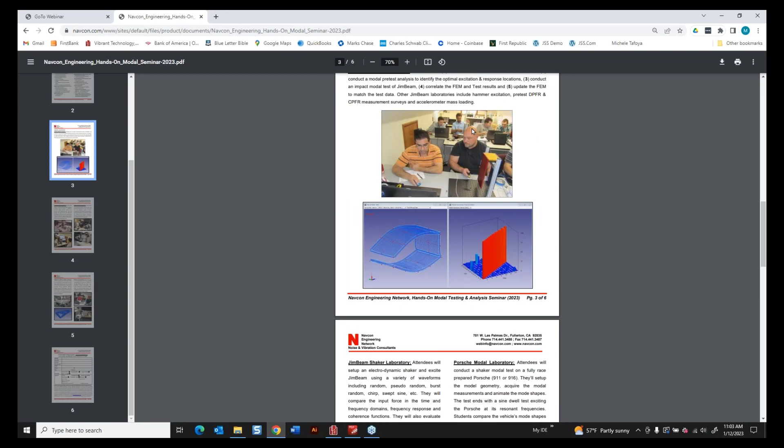This webinar is following App Note 54, which is called Simulating a Rapid Impact Test. On our website, vibetech.com, you can click on the resources tab, and if you have a current MEscope license, you can download App Note 54 and follow along.

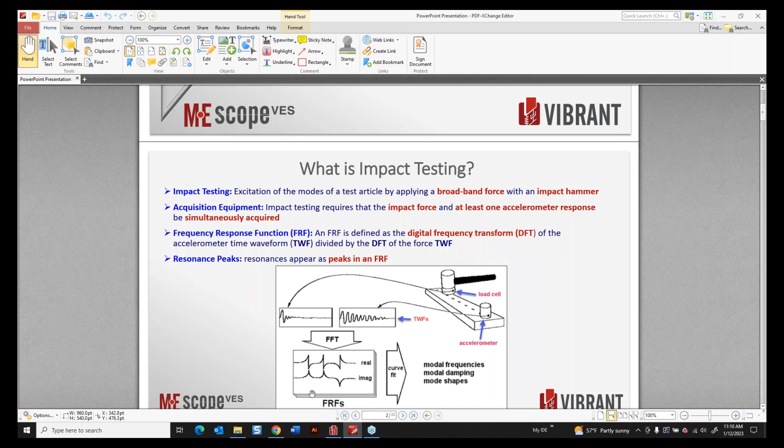Here's a definition of an FRF. It's the digital frequency transform, the DFT. Again, these are commonly used terms, but we use them a lot at Vibrant, just so that we're all on the same page. There's a lot of terminology. Some people would just say, well, that's the FFT. The FFT is an algorithm that takes the digitized time waveforms, which we call TWFs, does a Fourier transform on them, and creates digital versions of the spectrum of the signals. So here we call that a digital frequency transform, or spectrum. You can interchange those words also.

So we get both a DFT of the accelerometer response and a DFT of the force. Both of those are simultaneously measured. And so we need 2 channels that simultaneously sample and filter and condition the signals, amplify them, whatever goes on in the acquisition equipment to provide two TWFs, which then are converted into FRFs. Then we go through a process of curve fitting, and we'll do some of that later in the webinar.

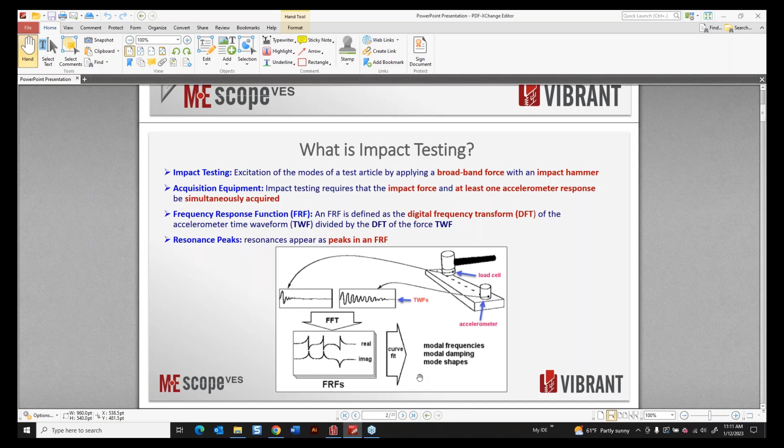And we extract 3 fundamental properties of every structure that vibrates, which is virtually everything. If there's mass and elasticity in the structure, it will vibrate if you apply a force to it. Even the earth, I've experienced it out here in California. Earthquakes cause the surface of the earth to resonate, only for a short period of time, but I've actually witnessed it during earthquakes. Okay, so let's move on.

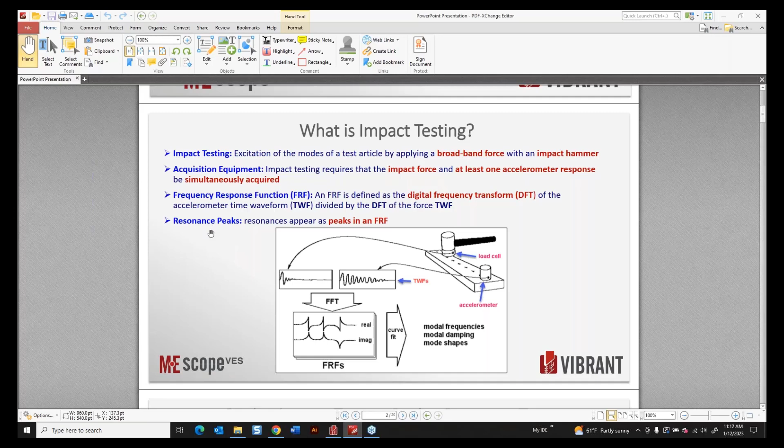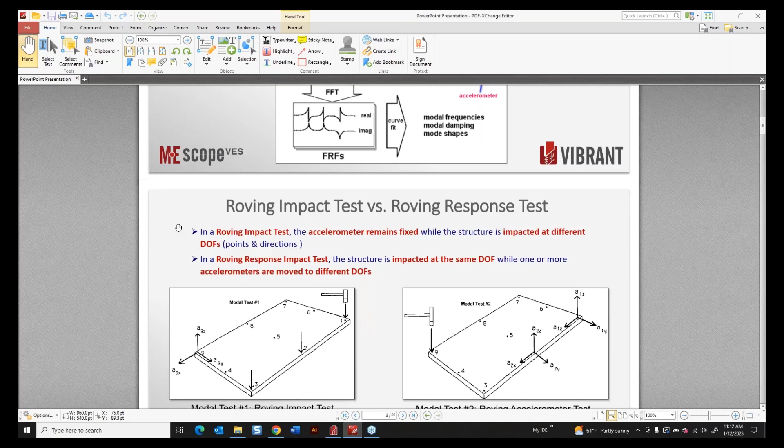Now, here's a key issue. Resonance peaks occur in an FRF. So that's why we make that type of a measurement. Now, a couple of weeks ago, we had a webinar, some of you might have been in attendance, where we asked the question, do these 2 types of impact tests yield the same information? And this was part of another app note, and we have over 50 of them on our website. So if you have a license to MEscope, you can use these app notes for self-training, or even use them among yourselves as engineers to get familiar with this type of testing.

Anyway, a roving impact test is the one on the left. That's where the accelerometer that's measuring the response remains fixed to the structure, and the impact hammer roves from one point to the next, and it can even be in a different direction, and that would be a unique measurement also. And then the test on the right is a roving response test, where the impactor is applied at the same point, same direction throughout the test, and the accelerometer, in this case a triaxial accelerometer, is moved from one point to the next.

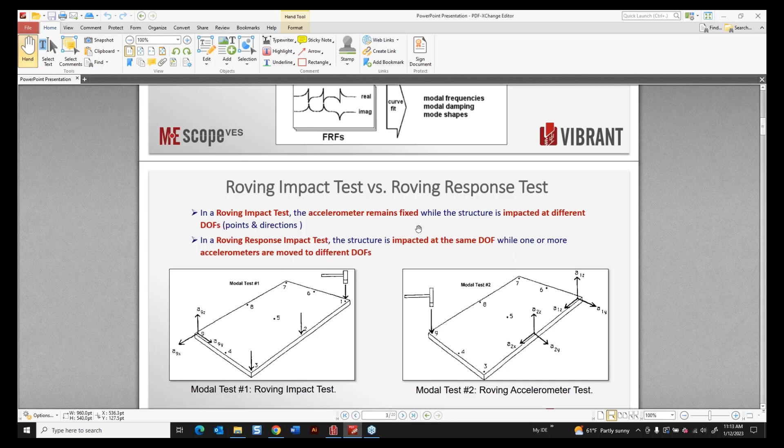So these are the 2 simplest ways of doing an impact test. And of course the question was, do they give the same modal information? Now, up here in this previous slide, the modal information that the question was asking about are the frequencies of the resonances, the damping of each resonance, and the mode shape, which is the spatial deformation of the structure at the resonant frequency. So those are the fundamental properties of resonant vibration.

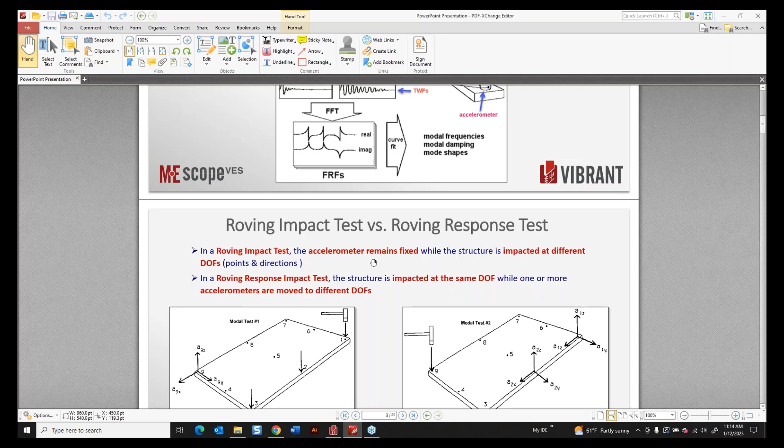And as I said, most structures that we experience here on Earth especially have all 3 properties. A resonance has frequency, it has damping associated with it, and it has a characteristic spatial deformation over the span of the structure, which we call the mode shape. So let's move on.

Okay, we're gonna simulate a roving impact test, or in this case, we're going to do a rapid impact test, and we'll see the difference. But here's a traditional roving impact test, a picture of how you would do it. The accelerometer remains fixed, and the structure is impacted at different DOFs. A DOF is a point and a direction. So at any single point on a structure, I can have 3 DOFs.

And again, we're talking about translation, just motion in a direction. Actually, I can have an infinite number of DOFs because I can just keep changing the direction of motion. So on any real structure, there's an infinite number of DOFs at each point. But typically, we break things down to X, Y, and Z, or horizontal, vertical, and transverse horizontal. You can see the little XYZ axis down here. That will capture the 3D motion of any point if we have a sensor that can sense that.

But in an impact test here, the roving impact, the DOF of that reference sensor is not part of the test, really. It can be anywhere. Well, it is a part of the test. We want to pick what we call a sensitive point where the structure is vibrating. If we put it on what we call a node point of a mode shape, that's where the structure is not moving at all at that frequency. So we want to pick active points or sensitive points for a fixed reference in a roving impact test.

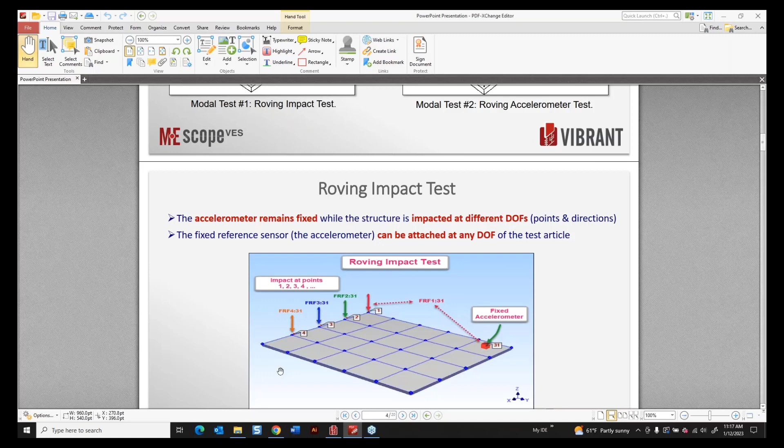And then here it's depicting 4 impacts at points 1 through 4. The other thing to notice here is that the FRFs are labeled with a particular type of label where the roving point number is followed by a colon, and then the reference DOF, in this case just a point because everything's just in the vertical, is part of the definition of that FRF. So what it's saying is that every FRF is the dynamics between an input point and a response point, or an input DOF and a response DOF.

Okay, so here's another key issue. I've already addressed this, and that is that each FRF is identified by the hammer DOF and the accelerometer DOF. In this case, the DOF is just a point number and no direction associated because everything's in the vertical. Only the roving impact DOFs define the ODS or mode shape DOFs.

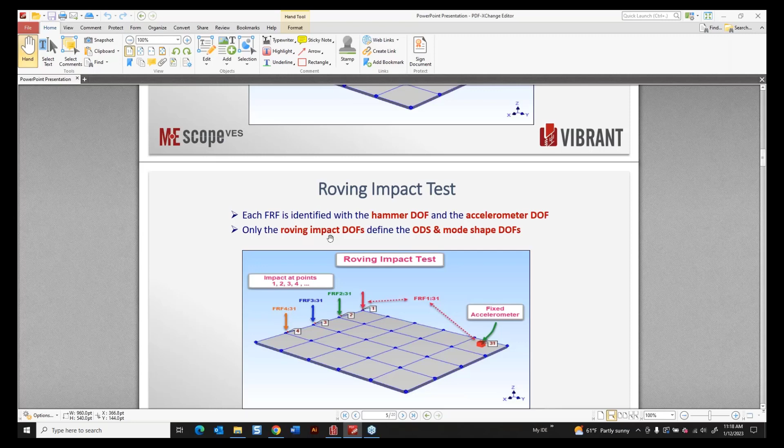So again, if we're going to define the spatial deformation of the structure, an ODS and a mode shape, we won't get into the difference between those two. Let me just suffice it to say that all ODS data is what we acquire experimentally, and every ODS is a summation of contributions due to mode shapes. That's all I want to say about that. We can come back to that if you have any questions, but let's move on and look at some live data off of this aluminum plate, this flat plate.

So this is some real data that was taken off of a plate where we impacted it with a roving impact test. And so in MEscope, the properties of each FRF are listed in what we call the M#s or measurement numbers spreadsheet on the right side. So when you open up a window in MEscope with some data in it, either time and or frequency, in this case, they're FRFs, which are functions of frequency.

So you can see the frequency axis down here on the bottom. And then this is just log magnitude. So the log magnitudes and the units are G's per pound. So what is that? Well, the units are the units of the accelerometer response divided by the units of the force input.

So if I want to get scaled data, and I'm going to go on and use it for other reasons, and we'll get into that in a minute also, then I want to scale my sensors when I'm acquiring the data so that the digital data that I end up with from the acquisition front end are in engineering units, pounds of force, G's of accelerometer response.

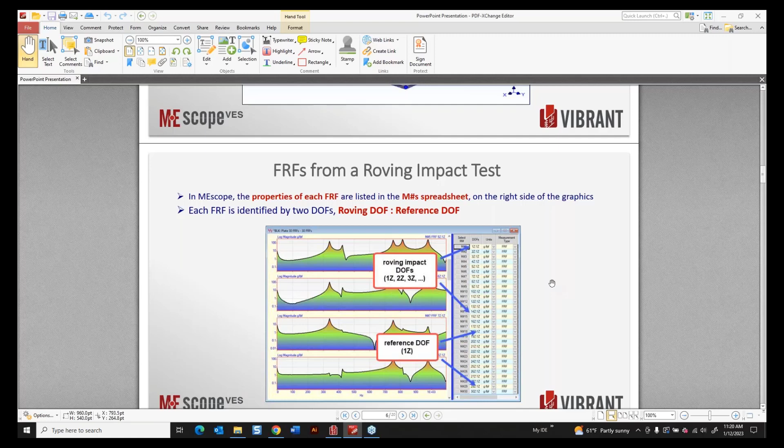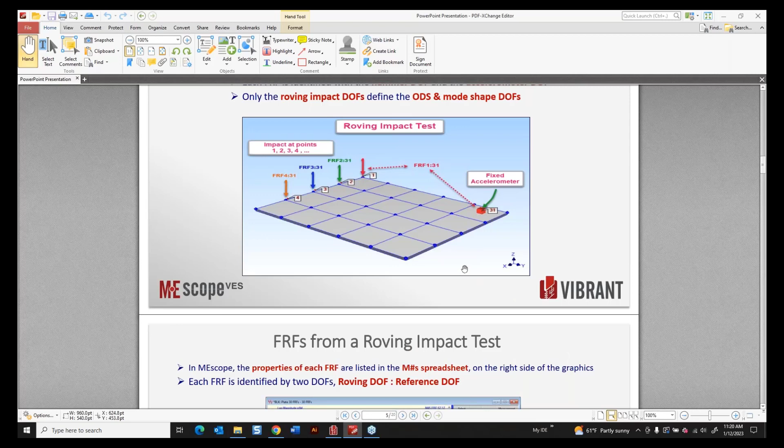Okay, the other thing in this spreadsheet are the DOFs of the FRFs. So you can see that in a roving impact test, the DOF in front of the colon changes between measurement 1, 2, 3, 4, and the DOF behind the colon is the reference. In this case, it was 1Z. So 1Z could be anything. It could be like it shows up here. It could be 31Z. Doesn't matter, because the mode shapes that we get from the data are going to be defined by the roving DOF.

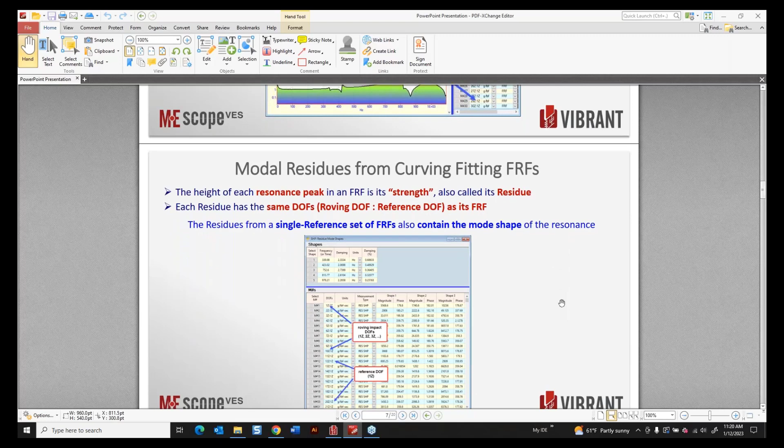Okay, so let's get into curve fitting now. This is where things become a little mysterious for those who haven't had experience using a software package like MEscope. The key step in doing broadband testing, either with a shaker or an impact hammer like we're talking about here today, is that we excite many resonances simultaneously with the force. And then we have to go into these FRFs that have peaks in them and do what we call curve fitting.

Now, curve fitting is a process of matching an analytical or a mathematical model to the FRF data. And in the process, we identify the unknown modal properties: frequency, damping, mode shape. So what do we get out of it? Well, for each peak we get frequency, which is the location of the peak along the frequency axis, and damping, which is the width of the peak. We won't go into that in detail today, but the higher the damping of a mode, the wider its resonance peak in an FRF.

And then what we call the strength of the peak is also called a residue. And that's a mathematical term that comes from calculus. Some of you mathematicians may be familiar with it. It comes from integrating around a resonance, which is also a singularity. And the remainder, what's left over after we do that contour integration, is called the residue. So just like the common use of the term, something I throw away in a trash can or something that goes down the sewer pipe is residue. However, the higher the peak, the greater the strength, and the magnitude of the residue is greater.

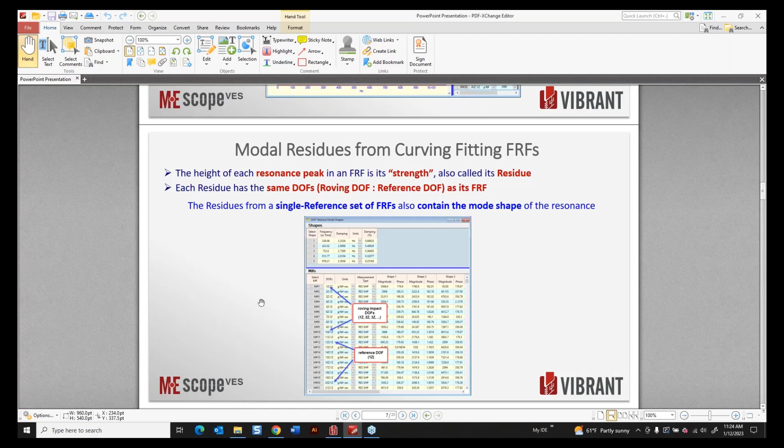So the residues from a single reference set of FRFs, which would result from a single reference modal test, contain the mode shape of the resonance. And the DOFs here, you can see the measurement type. This is called a residue mode shape. So RES SHP, residue mode shape, because we got them from curve fitting. You can see the units, they're a little different than the units of the FRF. They've got seconds in the denominator along with the pounds of force. But the DOFs are the same as the DOFs of the FRFs.

So now we're going to get into the whole issue of testing and the practical problem of testing a large structure. So here we have kind of a small structure. It looks like a little beam, but just imagine that to be a bridge or a large space structure, launch vehicle, whatever. I've had experience over the years of testing bridges and space shuttle launch vehicles, very large. The impactor, of course, is larger, and the accelerometer can be larger, but typically there you use an accelerometer that will sense lower frequencies. So as you go up in size of any mechanical system, structure, machine, you want to make sure you capture the lower frequencies.

Okay, so here's a picture that shows an impact hammer with a load cell that's going to measure the force. The accelerometer is going to measure response. And this is a roving impact test where I can locate the analyzer close to the accelerometer with a short wire. So we're assuming that this is a more traditional way to do it. Now we're getting into the use of wireless sensors and video to do this type of testing also.

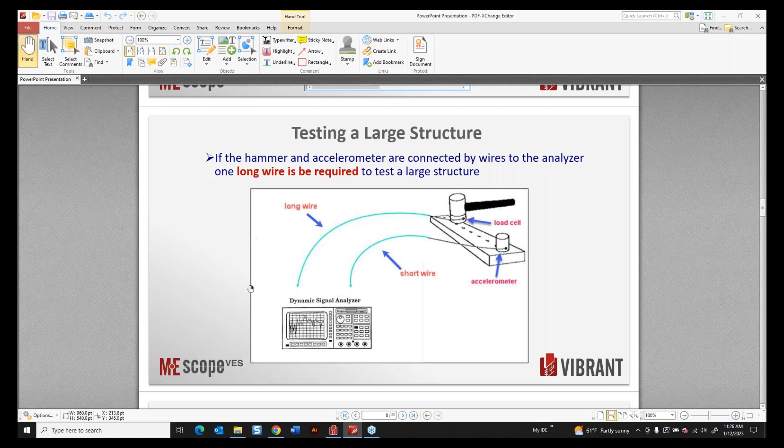But more traditionally, if you're going to go out and test a structure, a car body or a frame, and you want to do a roving impact test, you're going to need a long wire to go from the load cell to the analyzer. So here is the difference.

If the analyzer can be moved between acquisitions, and we have lots of portable analyzers now, battery powered, small analyzers. In fact, I'll mention right here that with our rapid impact testing software and a 2-channel analyzer, Modal Shop, which is one of the vendors in our business, offers a 2-channel analyzer for about $1,000.

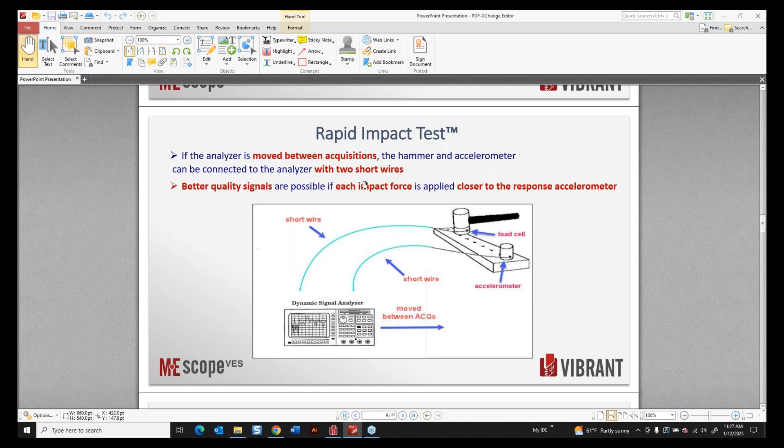Okay, so if the analyzer moves between acquisitions, I can do it now with 2 short wires. However, I need processing, and MEscope has it. We'll look at that here as we go along for processing this data. So here's some more comments. Rapid DOF: both the impact DOF and accelerometer DOF can be changed between acquisitions. However, we need to form a chain of acquisitions, and we'll see that in a minute.

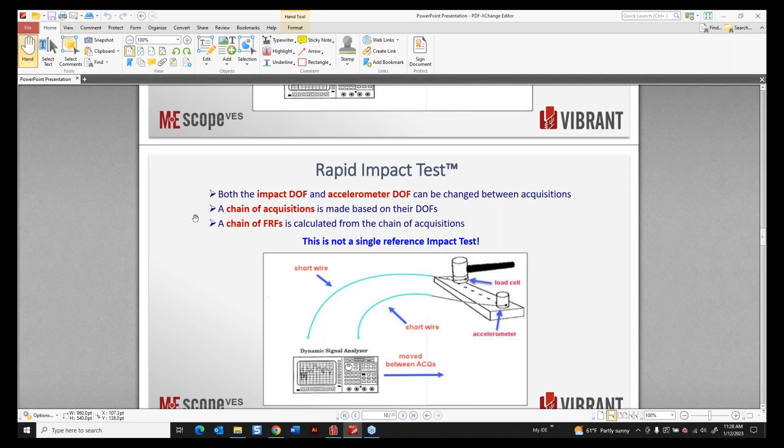The chain of FRFs is calculated from the chain of time waveforms. So everything starts off by capturing the dynamics with time waveforms and then using FFT processing and other signal processing. But this is not a single reference impact test. So that's the point of a rapid impact.

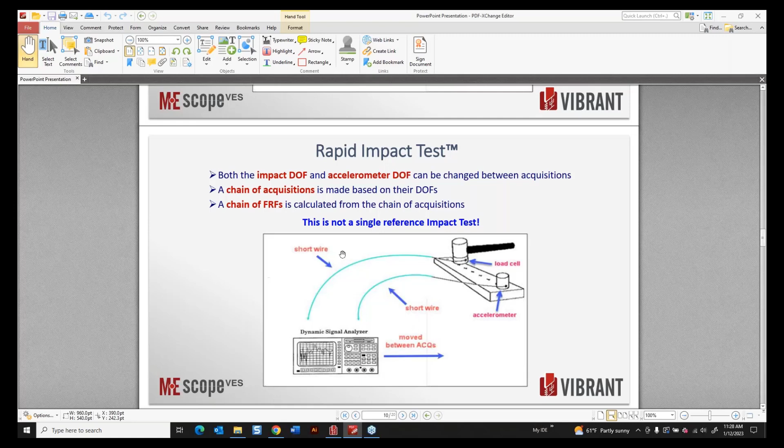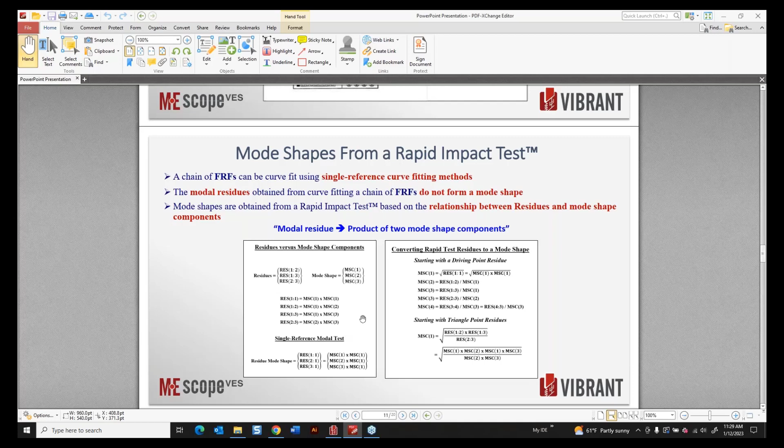They don't have a roving impact in front of the colon or a roving DOF and then a fixed DOF following the colon. But this is how in MEscope we process that kind of data, and this is just simply showing that these residues are the product of 2 mode shape components. That's the key in the mathematics that you need to understand.

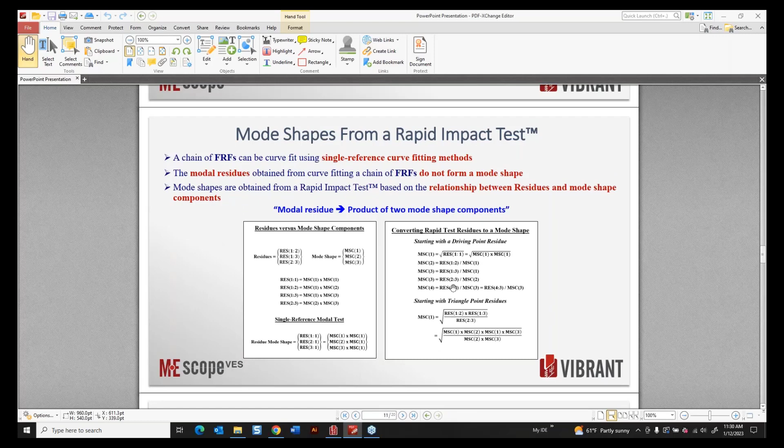So modal residues are obtained by curve fitting the FRFs, but they don't form a mode shape. We can use the same curve fitting that we use for single reference curve fitting to extract the residues. And the whole idea behind rapid impact testing is this relationship between the residues and the mode shape components. There's a little more detail over here. I'm going to go ahead because I want to get to the simulated rapid impact test. And this is the subject of App Note 54.

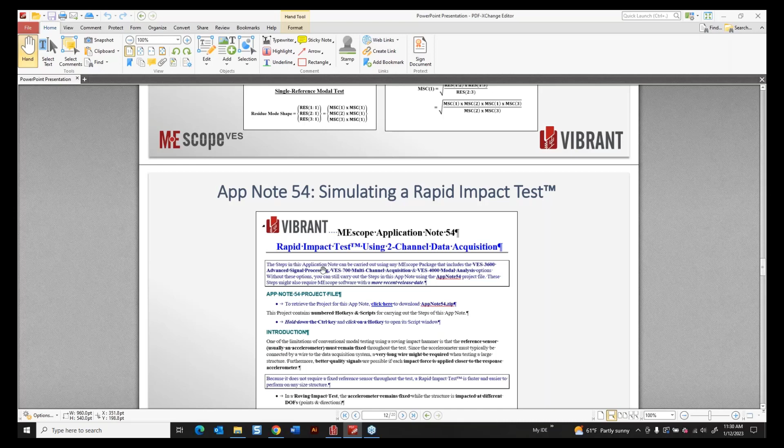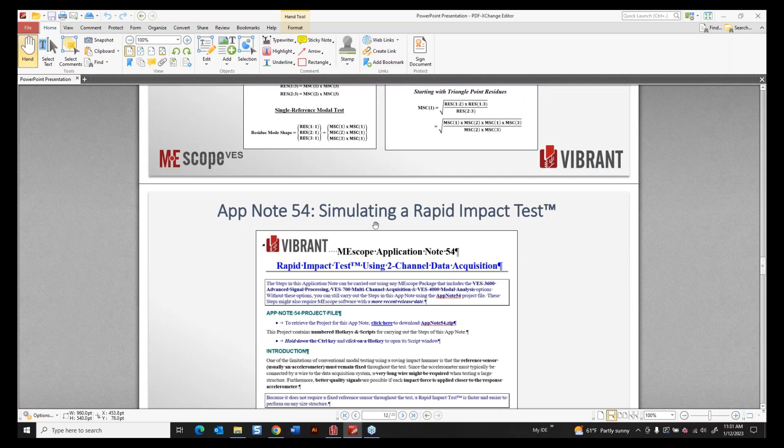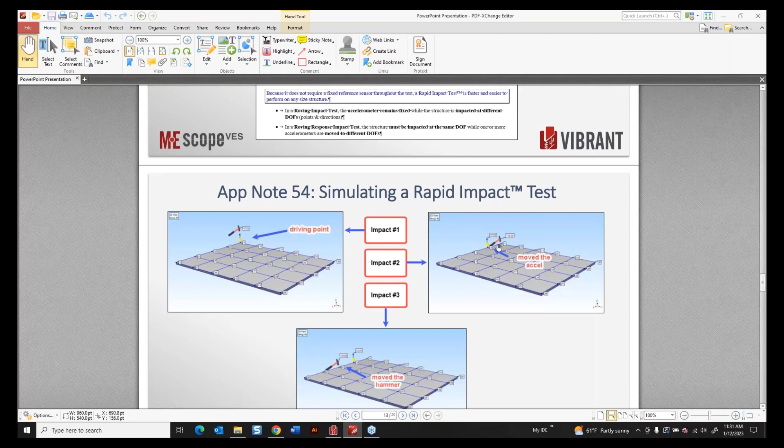But here's the way the rapid impact test would go. The first time we hit at the driving point, and that's a hard measurement to make sometimes, but experimentally there are tricks we can use where the accelerometer and the impact hammer DOF is the same. Now we go over and we move the accelerometer to point 2 and impact again, take another set of data. And then the third time we leave the accelerometer alone and move the impact.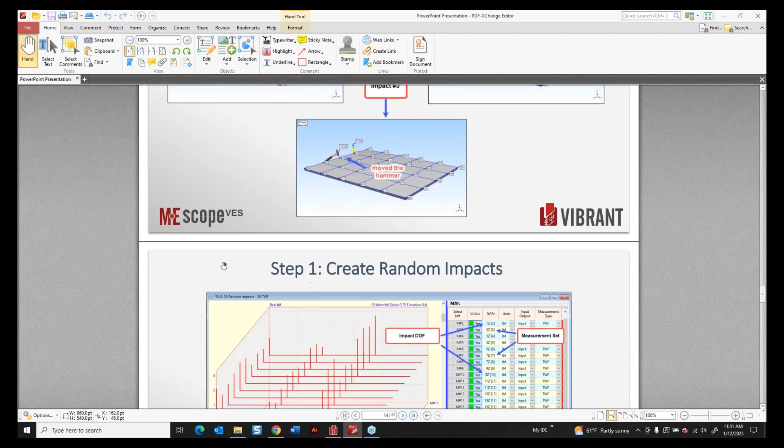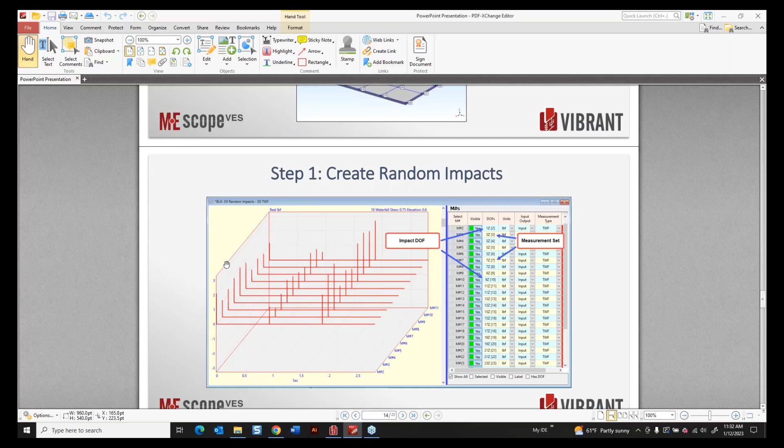So now we're going to go through the steps of this application note, and I'm going to run MEscope and show you how all this is done. Now in MEscope we have something called scripting. Those of you that own MEscope have probably never used it. It's a standard part of MEscope, and each script can have a hotkey associated with it. So these are just like commands.

If I press a hotkey, it will execute a script, and it will cause MEscope to do a whole bunch of things automatically. Let me just show you one here. Okay, so the script is just a spreadsheet, and here's the target window command. So I can execute any command in any window in MEscope.

I put in the name of the window, I put in the command, and then when I execute this script, it's going to execute each of these commands in this spreadsheet. And this one here happens to be fairly short. And it just rattles through each line of the spreadsheet and executes the MEscope commands. So that's what that's all about.

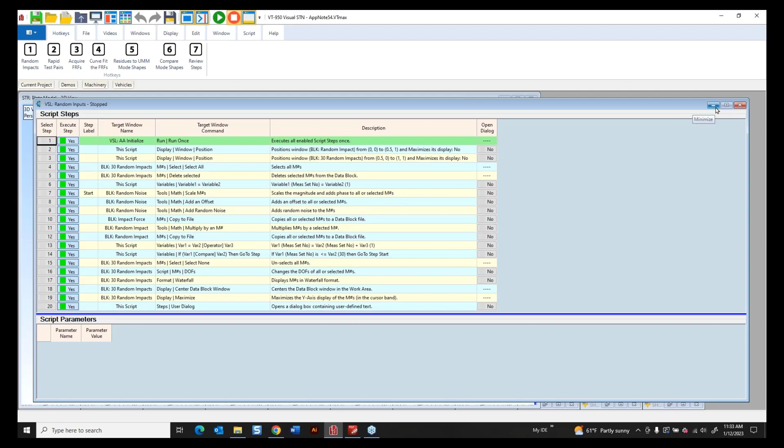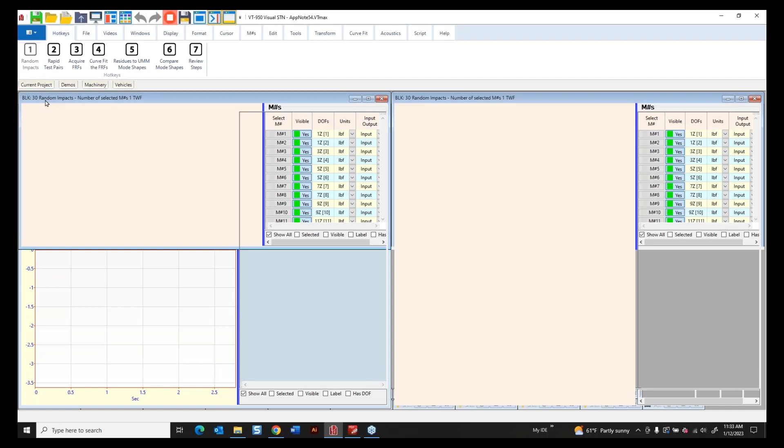Let me put this back down, and here's our test article. You can see our 30 points. And the first thing we're going to do is simulate some random impacts. So I'm going to build up a data block that has random impacts in it. So let me just go ahead and push that, and you'll see a bunch of stuff happen in MEscope. And then when it's finished, you can see over here, it's building up a data block full of time records. Bingo. So these are time waveforms.

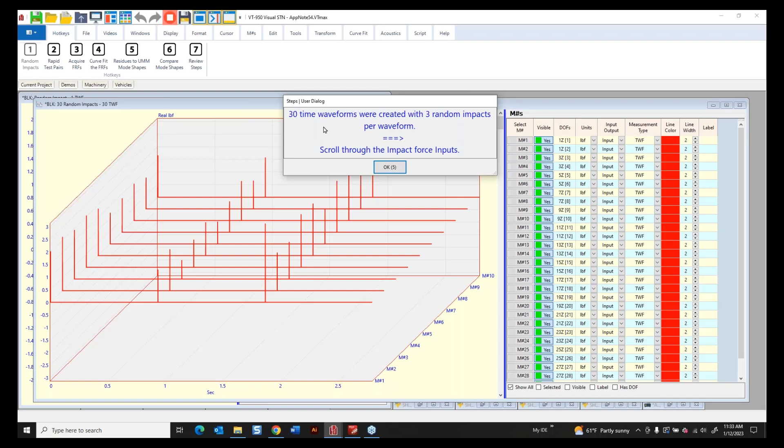Okay, here's a little message telling what happened. Again, this is part of scripting in MEscope. 30 time waveforms were created with 3 random impacts per waveform. Scroll through the impacts. So here they are. If I scroll through these impacts, you can see that they're just 3 impacts in the time domain that have random magnitudes.

So this would simulate a real impact test where you can't control the level of the impact. You're just gonna hit the thing with a hammer, and these are all randomly stored here in a data block. And you can see there's 1, 2, 3 of them for each. So if I go over here in the spreadsheet, you can see the units are pounds. They're all labeled as an input. That'll be important here in a minute. They're time waveforms, and they have DOFs.

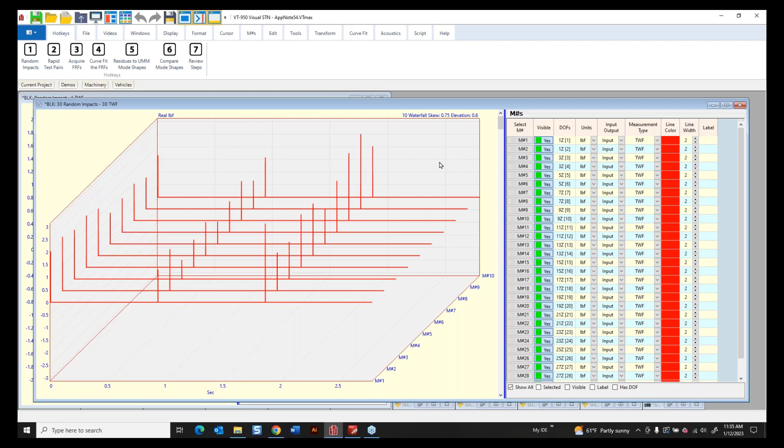So you can see the DOFs are a little strange. There's 1Z, 1Z, and then 3Z, 3Z, 5Z, 5Z. Well, those are the points where we're gonna actually apply the force to the plate. Point 1, 3, 5, 7, and so forth. So we're not even gonna ever hit this thing at point 2. We're just gonna jump over to point 3 with the hammer. Now, with the second measurement, we're going to move the accelerometer to point 2 and make a measurement there.

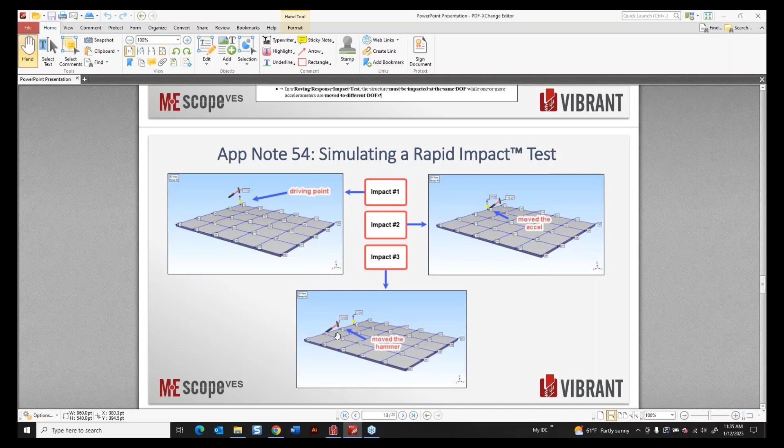So that's what we showed. If I go back here just real quick, we can see that the first impact's going to be at point 1, the second impact's going to be at point 1, but the accelerometer is going to move. Then we're going to move all the way to point 3 with the third impact. So that's what's going on here in this simulated impact test.

There's something else in here. You can see some square brackets with a number in them. That's what we call the measurement set. So when we do processing of our data in MEscope, this is all just record keeping. This is telling MEscope, okay, the first time I took data, it was measurement set 1, and then 2, and then 3, and then 4. And if I want to match up my hammer data with my response data, we use measurement sets in MEscope to do that. Okay, let's go back here and go to step number 2.

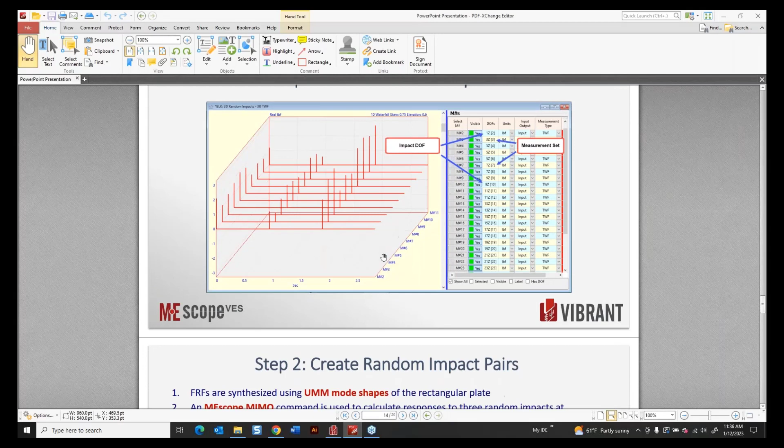So here we are, we created the random impacts. Now we're going to create random impact pairs. So we're going to do this with something in MEscope called MIMO, multiple input, multiple output. And there's several commands in MEscope for doing this. And what we're going to use are called UMM mode shapes. Don't go into that right now, but when I scale the mode shapes properly, this is another difference between an ODS and a mode shape.

ODS has certain engineering units based on my accelerometer or however I took the data. With a video, the units are going to be in displacement. With an accelerometer, the units will be in acceleration. Mode shapes don't have any units, so I can scale them in different ways. And one of the ways that we scale mode shapes is what we call unit modal mass. I'm not going to go into the mathematics behind it, but MEscope has a way with experimental data of scaling my mode shapes. Now, an FEA program will solve for unit modal mass mode shapes. They will come out scaled that way, typically, from an FEA package.

Okay, so we're going to go in and use these UMM mode shapes, which are scaled, and what it means is they have engineering units associated with them, whereas a mode shape in general has no units. You can scale it any way you like.

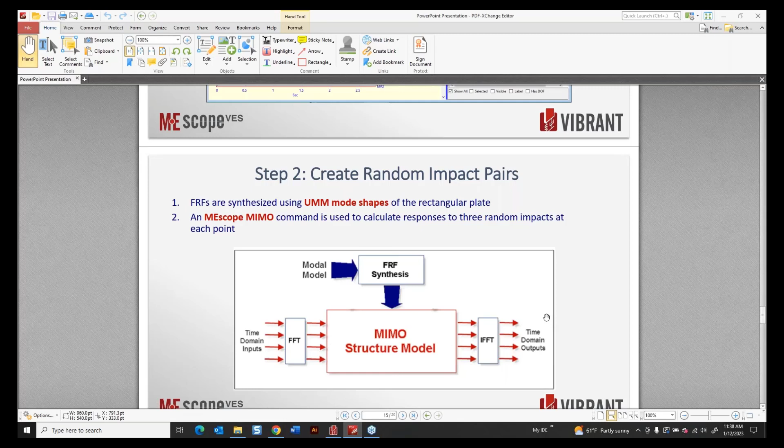We're going to go into MIMO with these, what we call a modal model, these unit modal mass mode shapes, synthesize FRFs, feed in the time waveforms, again, the random impacts, 3 of them, go through all this processing, and out come the responses of the accelerometers. So let's go back and do that. MEscope can simulate all of this.

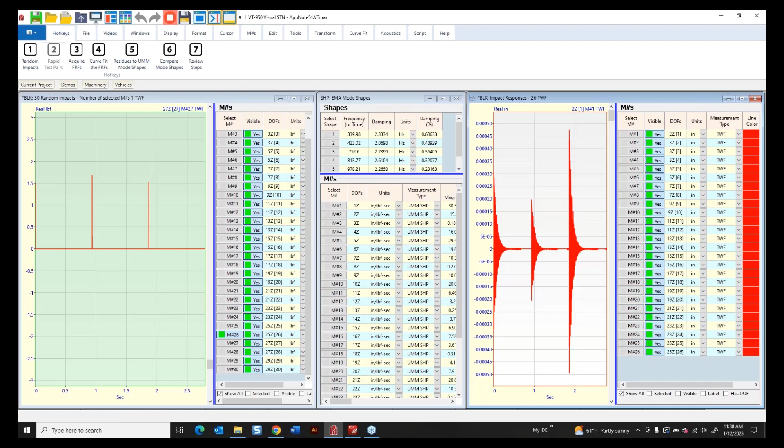I'm going to push the rapid test pairs, and now it's going to do all this processing using MIMO commands. Again, it's executing another script that is connected to the rapid test pairs. And you can see what's coming out here. On the right are the accelerometer responses.

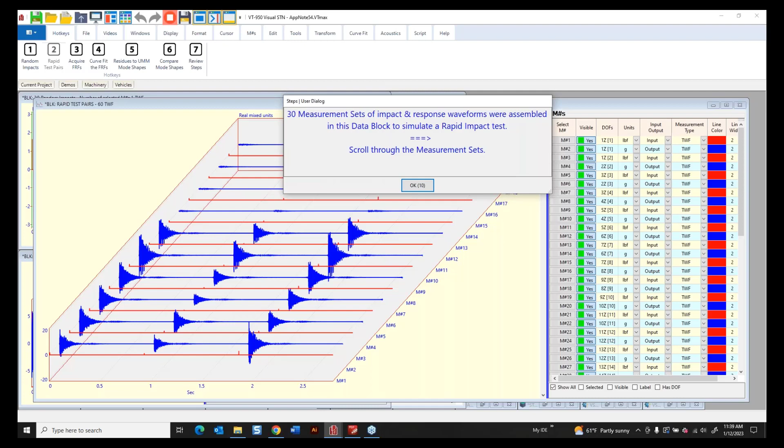And now it's doing some more processing because it's putting the impacts together with the responses. And again, this is where it used the measurement set numbers to match things up. So it's saying we got 30 sets, so the same amount of data that you would typically take if you were doing a roving impact or a roving accelerometer test.

But over here, let's just look at what we got now. The red ones are the forces, and the blue ones are the accelerometer responses. These are all time waveforms. The forces are inputs, the responses are outputs, and you can see that this is how the data is labeled for each of the measurement sets. So measurement set 1, number 2, number 3, number 4. So let's go on and acquire.

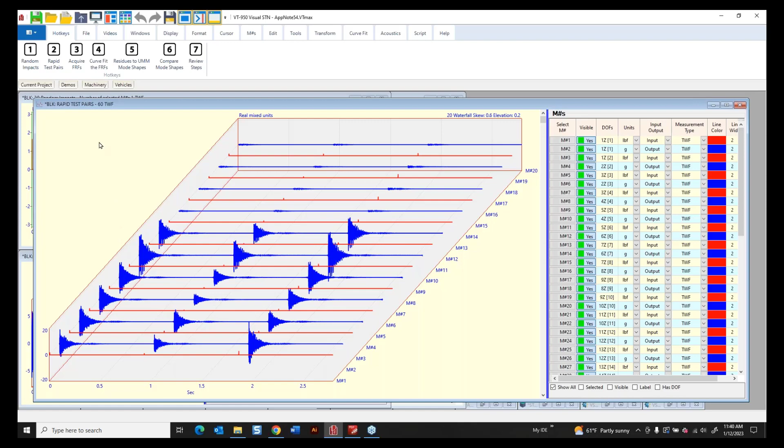Now this is where we're going to take this data, and so if you did nothing more than take a 2-channel analyzer and acquire this type of data, import it into MEscope, you could do the next step, which is process this data with what we call an acquisition window in MEscope, and you'll see it has graphics that go with it. We can actually put a little hammer on the 3D model, so you have to have a 3D model at this point if you're going to process your data.

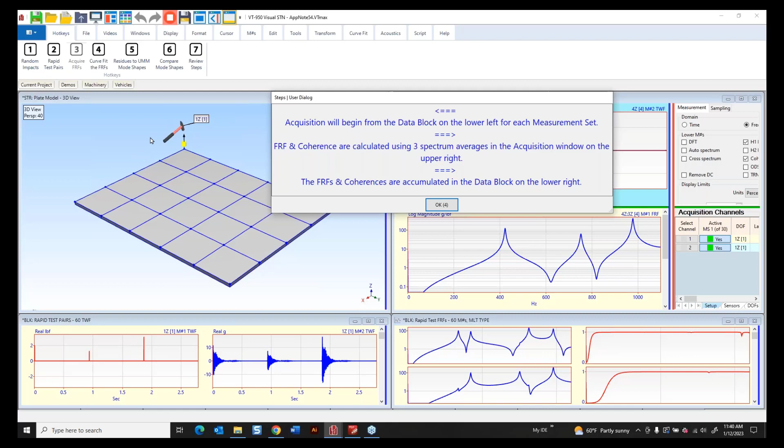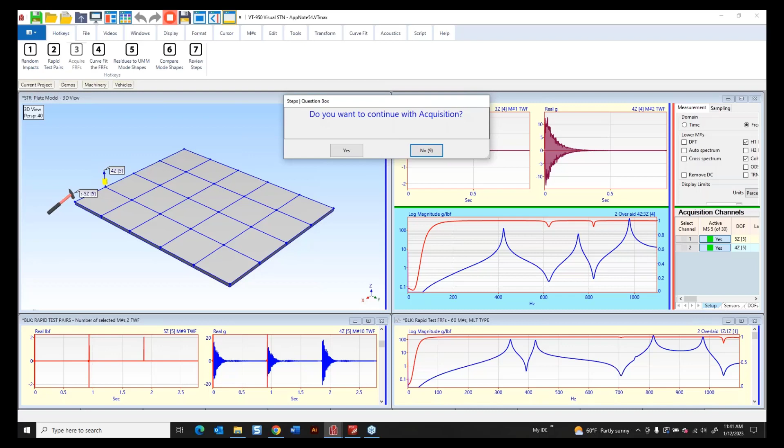But I'm going to let it go here. You can see that it's actually showing you graphically how it's processing this data. Now it's going to say, do you want to continue the acquisition? And in the interest of time, I'm going to say no. So now you can see that the acquisition has processed all the data.

I've got 30 FRFs. These are the rapid impact FRFs and their associated coherence. And it says scroll through the FRFs. So here they are. Again, this is typical data that you would get in any modal test. The coherence is the red, the FRF magnitude is the blue line, and there's phase in here also, but this is just showing the magnitudes and the coherence.

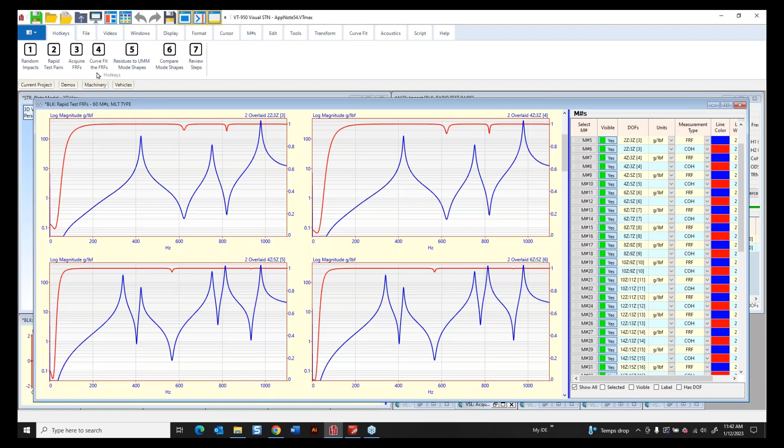You can see at low frequencies it drops off quite a bit, but that's okay. We're really only interested in the data around each of the resonance peaks. Over here you can see the units, G's per pound, and again the blue are the FRFs and the red are the coherence. Let's go ahead and do the next step, and that is the curve fitting of the FRFs. Now we're going to use single reference curve fitting here.

Okay, the script is processing this data, isolating the FRFs, and bingo, it's already done, and it says the curve fitting is complete. Rapid test residues are saved in a shape table on the right. So over here on the right, here's our curve fitting results. You can see these rapid test residues, RPT, rapid test residue, magnitude and phase.

The label shows the curve fitting method that we used to get the results. And you can see these residues have units of the FRFs. Same units, and we've got 30 of them in here because we had 30 FRFs. And then over here is the curve fitting. Now there's a red curve fitting function laid over the FRFs.

Now again, even though we had 3 impacts and did some signal processing to create the FRFs, this is almost ideal data. I mean, this is like it came out of a textbook, but it's a real simulation of the real thing. And then down here is what we call a mode indicator. So it's a sharp peak showing where the curve fitting found each of the resonance peaks and did a curve fitting.

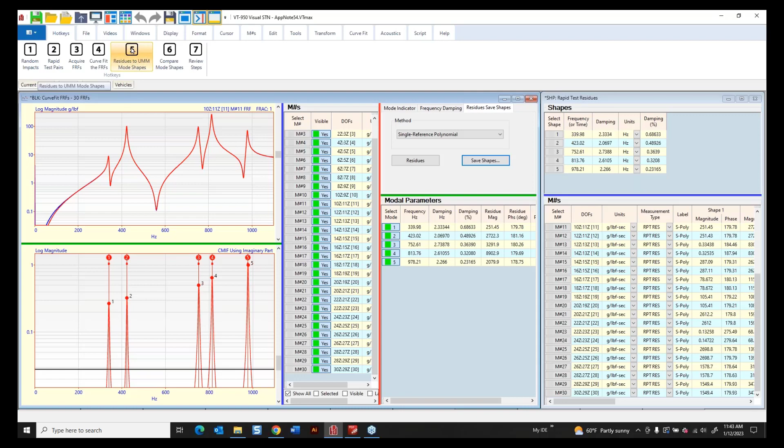And then over here is the modal parameters and some curve fitting results here. All right, we're going to move on to residues to unit modal mass. So we're going to convert these residues because they're rapid impact test residues. So again, this is something unique to MEscope. Rapid impact test residues are displayed on the left, and they're converted to unit modal mass mode shapes. Again, this is something going on in MEscope to convert, and you can see they're in inches per pound second.

They're scaled. These are unit modal mass. And then over here are the residue mode shapes, which are different magnitude values for sure, but the frequency and damping are roughly the same because we got the results from curve fitting.

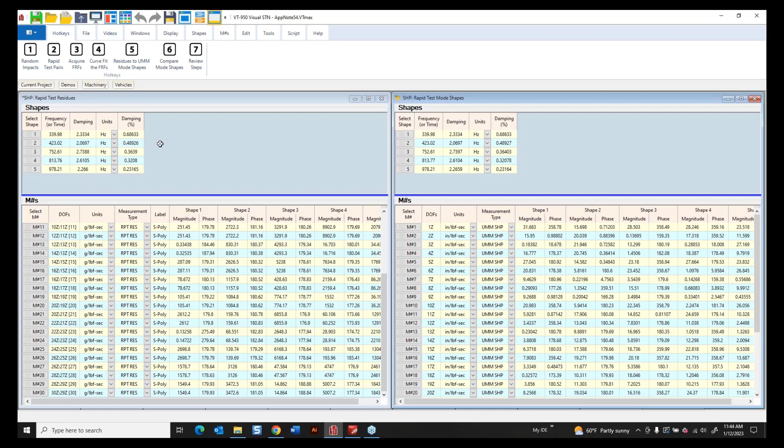Step 6, we're going to get close to the end here. Rapid test mode shape on the left, the original EMA mode shape with maximum MAC on the right. So here in a comparison animation, we're comparing the results of the simulated rapid test on the left with the results that we started with on the right, the UMM mode shapes, to simulate using the MIMO calculation. We fed input into the model and we got the accelerometer response.

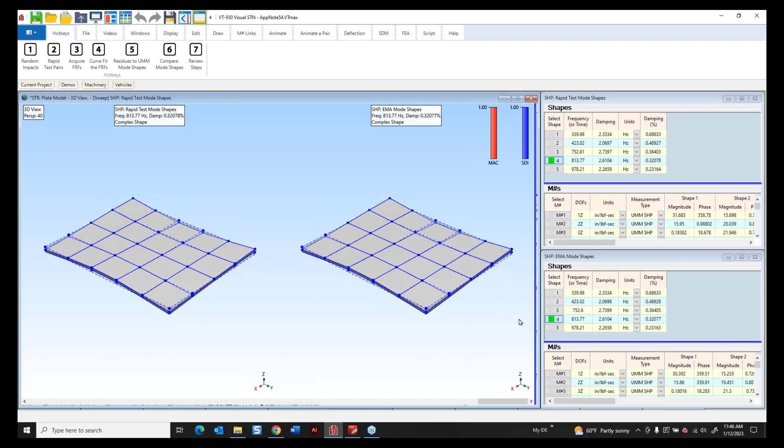So this is what's called a sweep animation through the two shape tables. You can see up above here are the rapid test mode shapes. Each of them has frequency and damping. Now this says frequency or time. I can have ODS data that is time-based. We call it a time-based ODS. That's what we typically get from a video. But mode shapes are typically frequency; they always have a natural frequency associated with them. You can see the damping is a little different here, but basically we got the same results back.

Up here are two numerical measurements that we use in MEscope for a comparison of two shapes. So MAC is an acronym for Modal Assurance Criterion. That's a very common way to compare two mode shapes. When the MAC value is 1, that means the two mode shapes are essentially the same shape. Now, SDI is something that's unique to MEscope. That stands for Shape Difference Indicator, and that compares the shapes numerically. Do they have exactly the same numerical values?

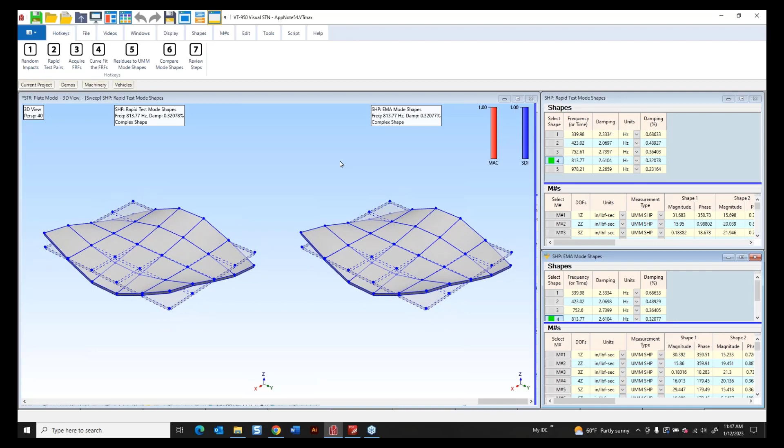Now, if I look at the shape table here for mode shape 1, as you can see, this is 31.68, and down here it's a little different. It's 30.39. So they're not identical component for component, but when the SDI value is 1, that means they are very close, comparing all the numerical values of one shape to another. And as we scroll through the different mode shapes, you can see both these measures, and essentially what that's saying is we did a round trip here with this simulation. We started out with some mode shapes and we ended up with exactly the same mode shapes.

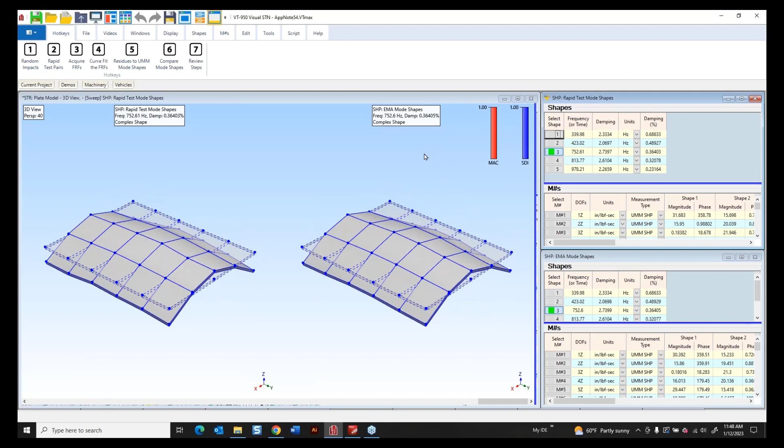Let's go back here. I'm going to click on the first one. Okay, I think they're all 1s, which is pretty amazing. That's very good. Now, if I had FEA mode shapes and experimental mode shapes, let's say residue mode shapes, the MAC values could be 1, but the SDI would be quite different because the mode shapes are scaled differently.

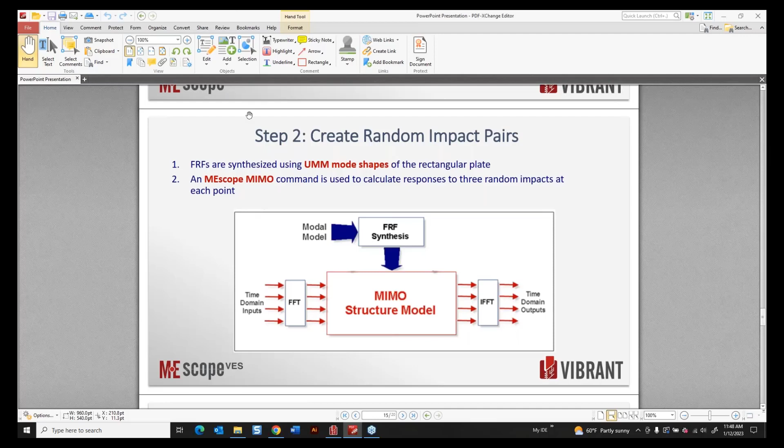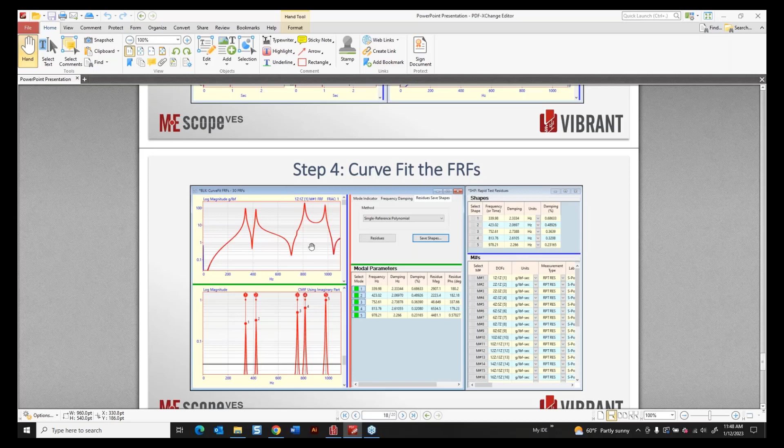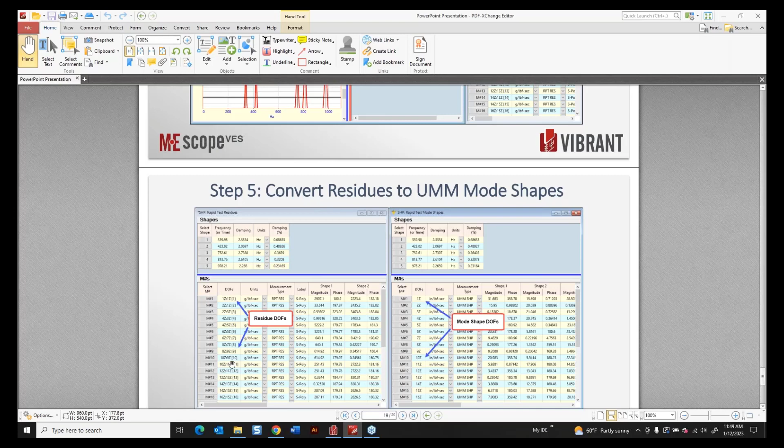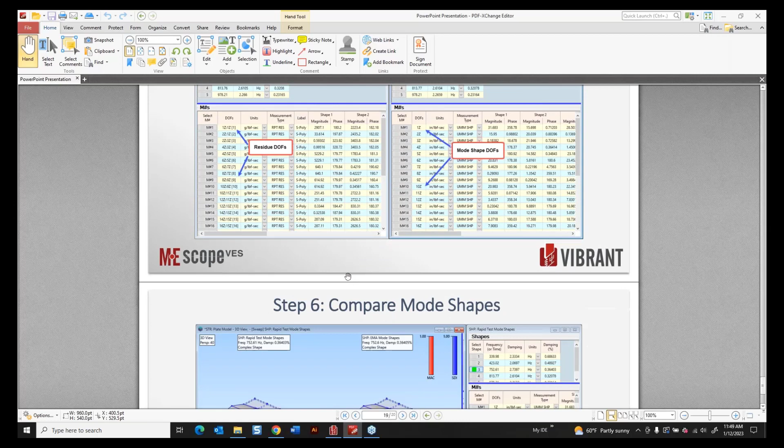And then down here, the comparison between the residue DOFs that we got from curve fitting, the rapid impact residue values, versus, now that's not a mode shape over here. These are just numbers that have different DOFs. The DOFs are associated with the rapid impact testing. Over here, the mode shapes are for each of the 16 points in the Z direction on this structure. And then we did a comparison and we saw that sure enough, on the round trip, we got back the exact same values. So Mark, that pretty much wraps it up for me.